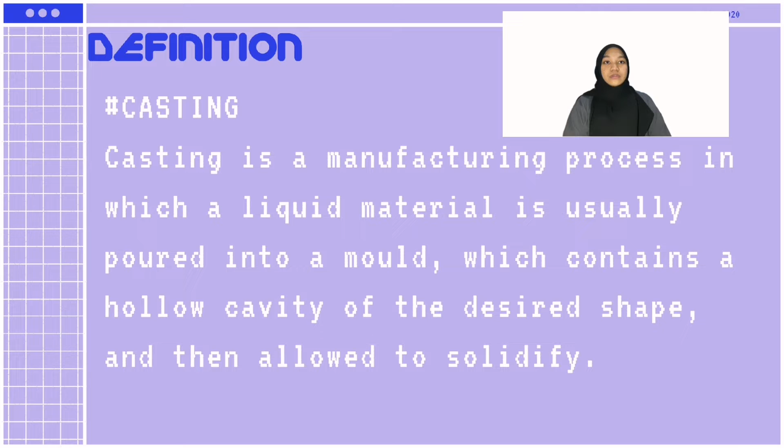So today I will explain about casting and placing concrete on site. First, definition of casting and placing. Definition of casting: casting is a manufacturing process in which a liquid material is usually poured into a mold which contains a hollow cavity of the desired shape and then allowed to solidify. The solidified part is also known as a casting, which is ejected or broken out of the mold to complete the process. And second, definition of placing.

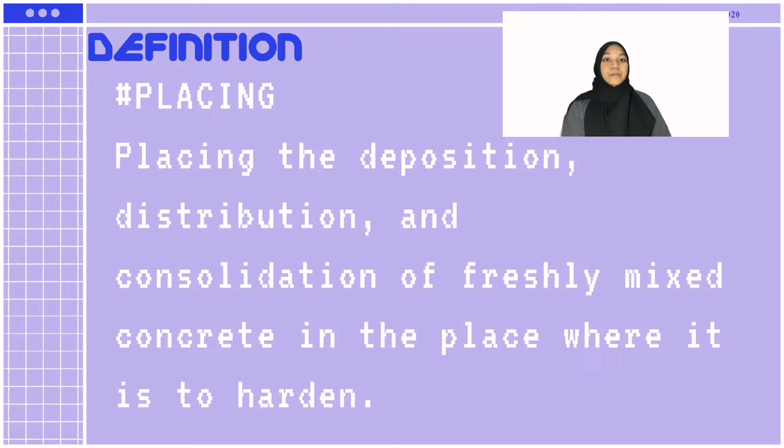Placing is the deposition, distribution, and consolidation of freshly mixed concrete in the place where it is to harden, often inappropriately referred to as pouring. After that, I will talk about the procedure of casting and placing on site. Number 1, concrete mix must be near the site. Number 2, it must be placed in uniform layers to avoid separation of materials. Number 3, for structural concrete walls and columns, it must be placed in layers of 450 mm thickness.

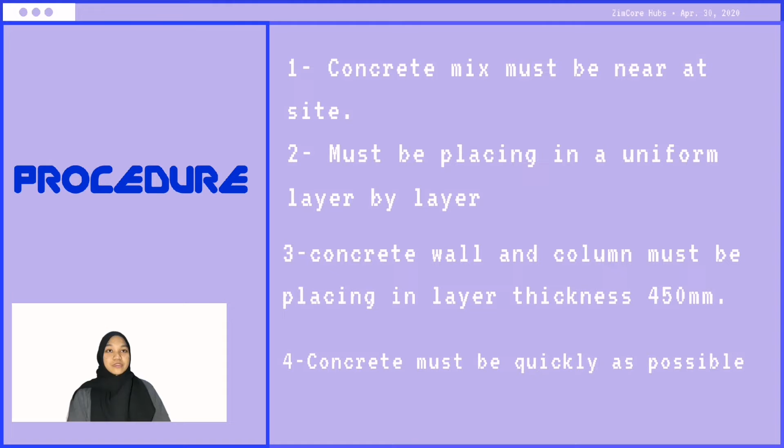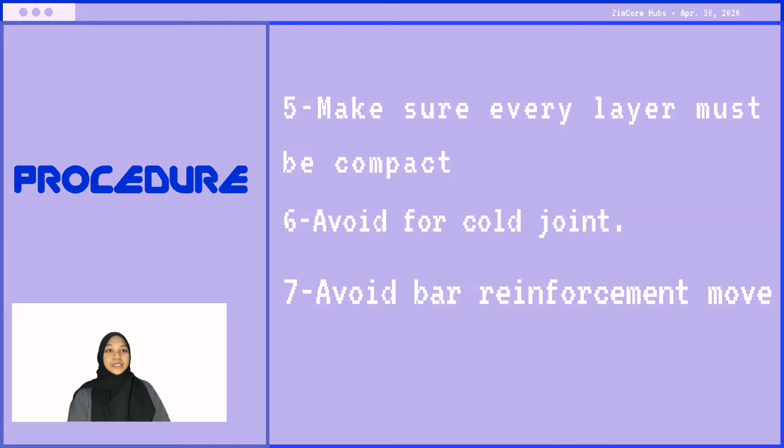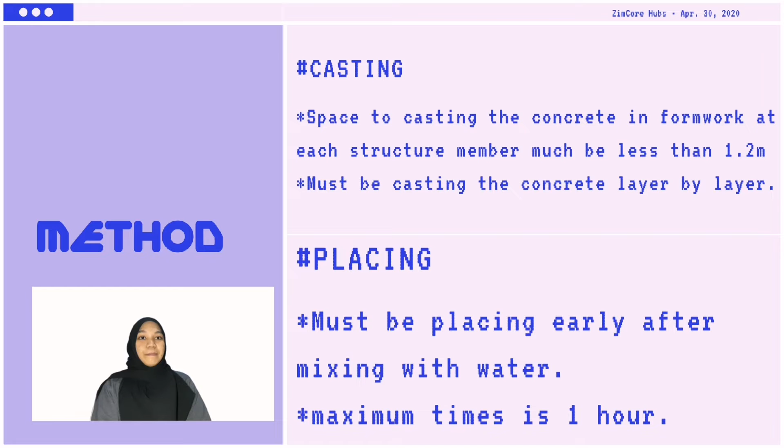Number 4, concrete must be placed as quickly as possible to prevent it from hardening. Number 5, make sure every layer is compacted before the next layer. Number 6, avoid cold joints. And the last one, avoid the bar reinforcement moving during casting and placing on site. Method of casting and placing. The first one is casting. The space to cast the concrete in formwork at each structural member must be less than 1.2 meters to avoid segregation. And number 2, the concrete must be cast layer by layer. The last one is placing. It must be placed early after mixing with water. Maximum time is 1 hour.

Next is the purpose of compacting concrete. Compaction of concrete is the process adopted for expelling the entrapped air as far as possible from the concrete to achieve the highest possible density. Properly carried out, it ensures the concrete fully surrounds and protects the reinforcement, tendons and cast-in inserts, and the formwork is completely filled. Concrete should be compacted immediately after pouring and placing the concrete in a form. Never let the concrete dry out since it will be hard to compact.

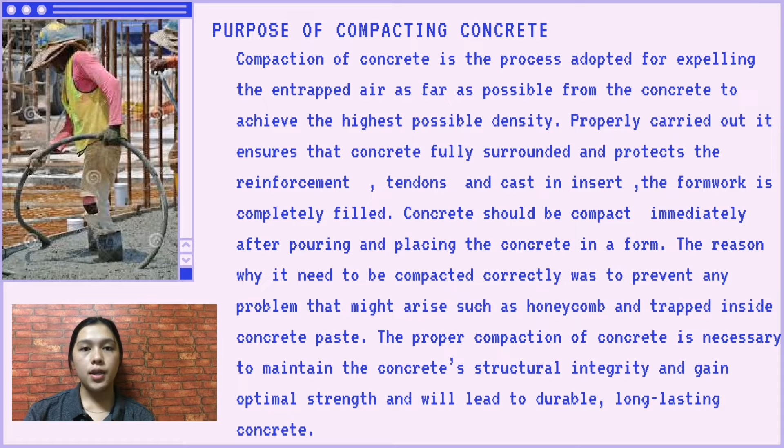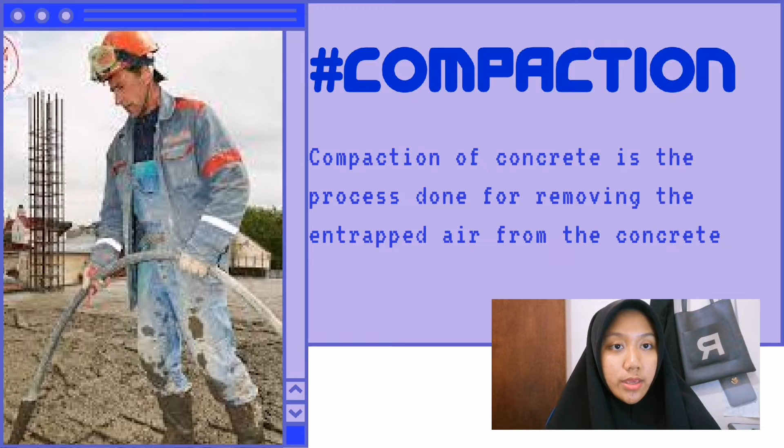The reason why the concrete should be compacted correctly is to prevent any problems that might arise, such as honeycombing and trapped air inside the concrete. Proper compaction of concrete is necessary to maintain the concrete's structural integrity and gain optimal strength, which will lead to durable, long-lasting concrete. I will explain methods of compacting concrete. First, we have to know what compaction is. Compaction of concrete is the process done for removing the entrapped air from the concrete.

I will explain two types of compaction of concrete. The first method is manual compaction, also known as hand compaction. In this method, a steel rod of 10 mm to 16 mm is used to compact the concrete by poking repeatedly into the concrete. And the second method is using a vibrator machine. There are three types of vibrator: internal, external, and platform vibrator. The internal vibrator, widely used, runs on electric or diesel power and has different sizes of pins. It must be used carefully so that the reinforcement in the mold is not moved or damaged.

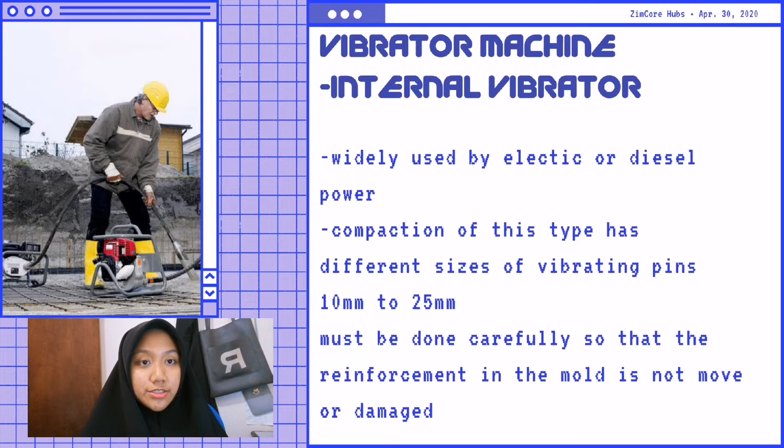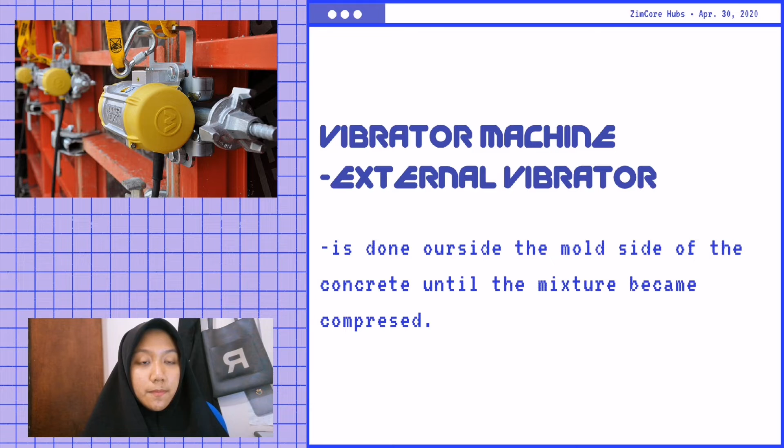The second type is the external vibrator. External vibration is done outside the mold side of the concrete until the mixture becomes compressed. And the last type of vibrator is the platform. A platform vibrator is a table supported by a number of springs run by electricity, which allows the face of the table to vibrate. Concrete parts should be made in formwork and placed on the table to vibrate for compaction.

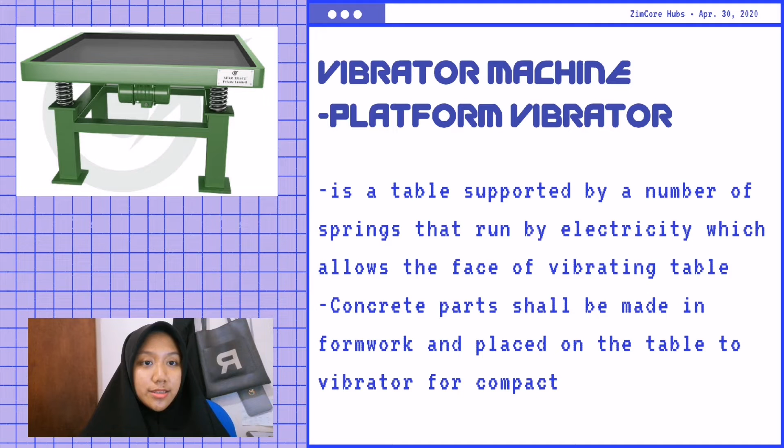I will explain the advantages of a concrete vibrator. First, honeycomb structure can be avoided. Second, structures with heavy reinforcement can be easily compacted. Next, the structure prepared by the vibrators is dense and watertight. Number 4, a low water-cement ratio can be used. Number 5, work speed increases. And number 6, a high aggregate-cement ratio can be used.

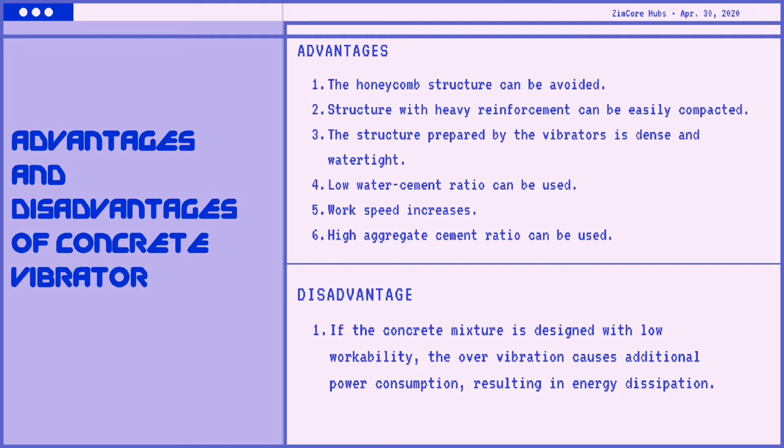Disadvantage of concrete vibrator: if the concrete mixture is designed with low workability, over vibration causes additional power consumption, resulting in energy dissipation. What is curing? Curing is a process of keeping fresh concrete in a moist and warm enough condition so that the hydration of cement can continue. Curing of concrete will increase its strength and decrease the permeability of concrete. Improper curing may also lead the concrete to crack.

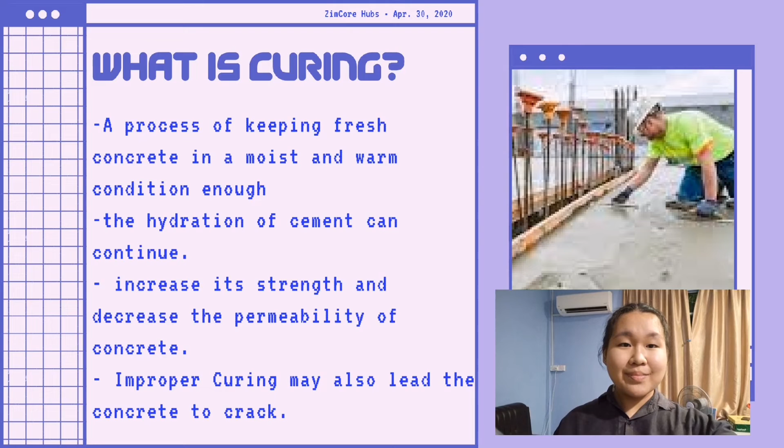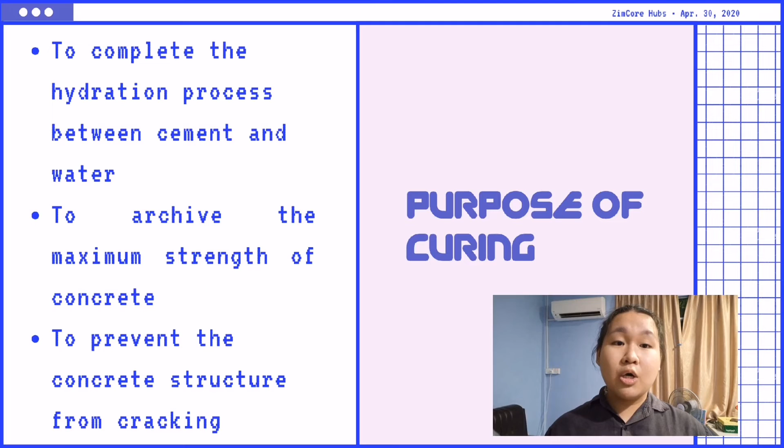So, what is the purpose of curing? The purpose of curing is to complete the hydration process between cement and water, to achieve the maximum strength of concrete, and also to prevent the concrete structure from cracking. There are a few methods of concrete curing. First, shading. By this method, the evaporation of water is locked in the concrete surface. It also protects the surface from heat, wind, and the rest. In cold climates, it prevents the concrete from freezing by preserving the heat of hydration of cement.

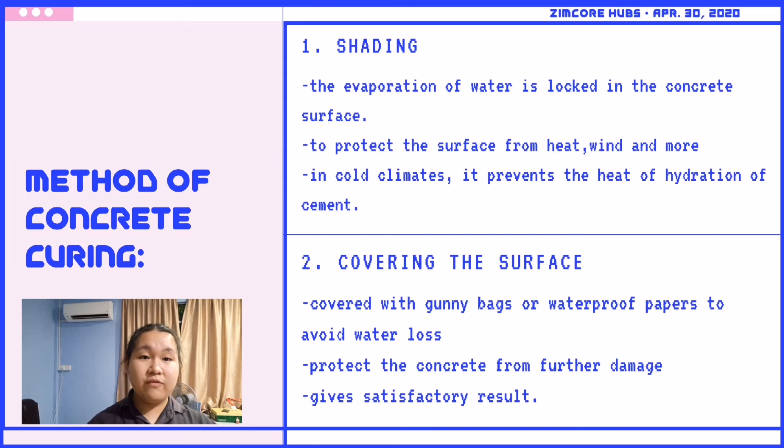Second, covering the surface. The concrete surface is covered with wet gunny bags or waterproof paper to avoid water loss and to protect the concrete from further damage. This method gives satisfactory results for concrete slabs and pavements. Next, sprinkling water. In this method, water is sprayed on the concrete with the help of nozzles at proper intervals. This method is not so effective due to the difficulty of keeping the concrete surface moist all the time.

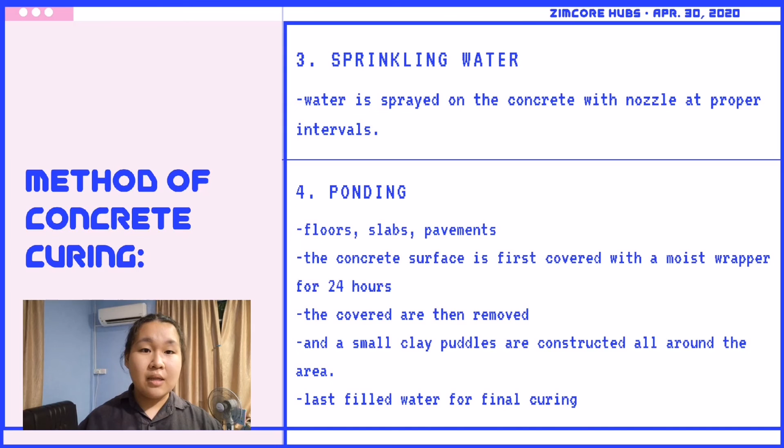Fourth, ponding. Ponding is the most common method adopted for curing concrete floors, slabs, and pavements. In this method, the concrete surface is first covered with a moist wrapper for 24 hours. After that, the covers are removed and small clay puddles are constructed around the whole area. Then water is filled for final curing. Fifth, membrane curing. In this method, the concrete surface is covered by waterproof membranes or sealing compounds such as bitumen emulsion, wax, rubber latex emulsion, water repellent, plastic films, and so on. The membrane prevents water loss from the concrete. It is seen that membrane curing for 28 days gives equivalent strength to 2 weeks of moist curing.

Last but not least, steam curing. Steam curing is done by increasing the temperature of concrete in wet conditions. This method allows the concrete to achieve its full strength in a short time. Thus, curing is also finished in a short time. Steam curing is mostly adopted for production of precast members.